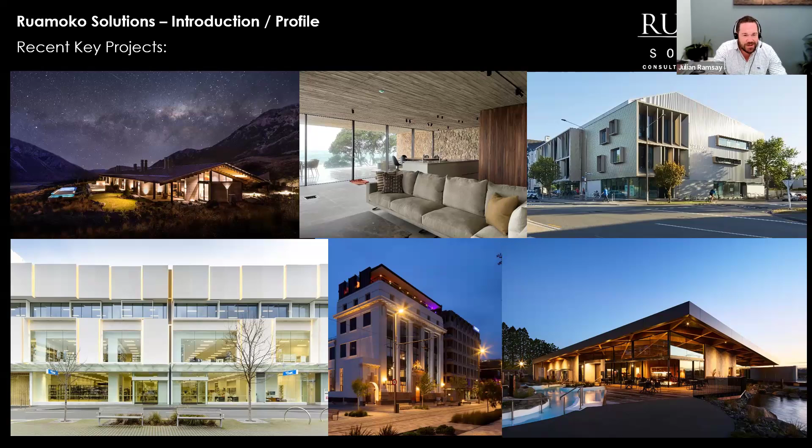There's a bit of high-end res. We do a lot of work for Patterson's Architects, based in Auckland. The school building on the bottom right, that's Redcliffs School in Christchurch. Building in the centre is a typical office building in Christchurch that was rebuilt. That was part of the rebuild.

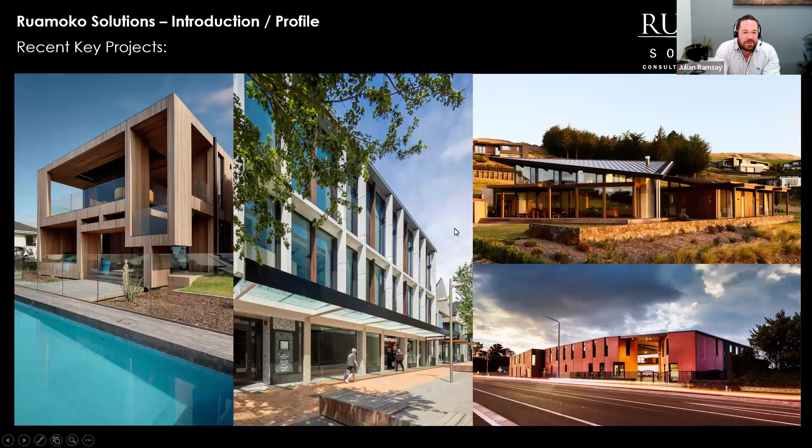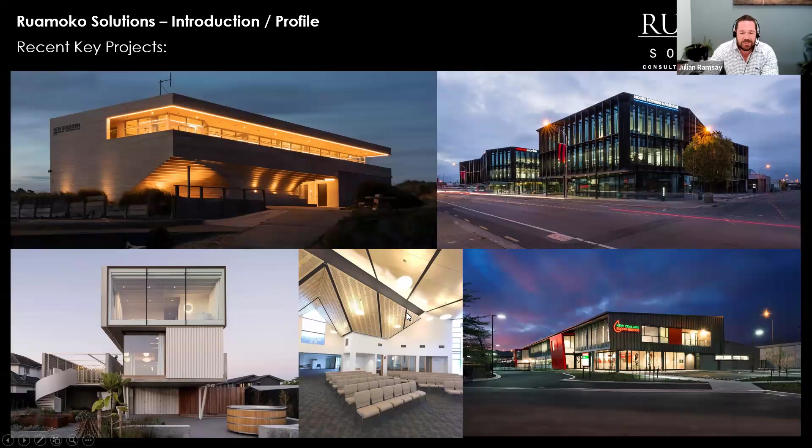A couple of quirky and weird houses. There's one on the left, and a church, St Mary's Church, built after the quakes, centre at the bottom. There's Flock Hill Lodge on the top left, suspended concrete chimney, that was fun. Lighting towers, that's Hagley Oval in the middle there, at the top.

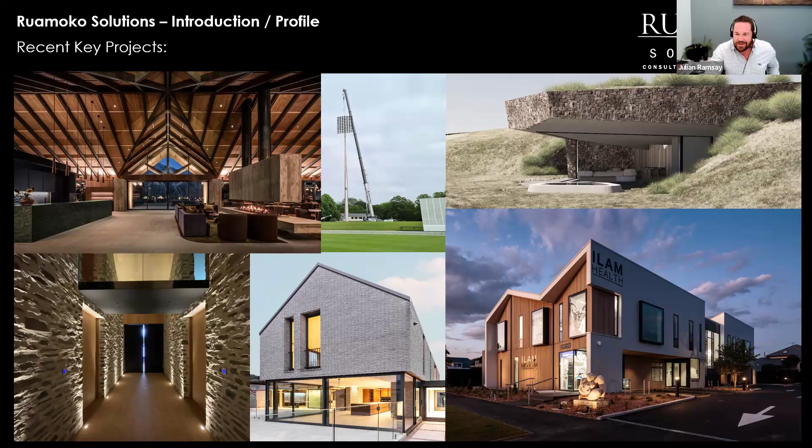Wakaroa, that's a Patterson's house with a 12-metre cantilever with terrain on top, which was a bit of fun, with a tolerance of about 5 millimetres on the end of the cantilever for glazing, which was a bit of fun. There's a couple of other houses there. I think that's Court Theatre, foundation pour, top left.

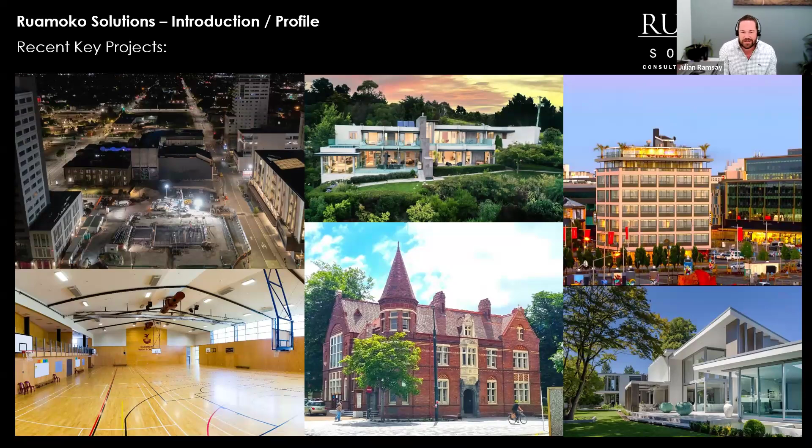There we've done quite a lot of strengthening work. That's the old municipal chambers in the centre. At the bottom, various other surf clubs, strengthening projects. The piano, which is in the entertainment precinct adjacent to the Court Theatre, that's on the bottom left. I'll talk about that a little bit more in a minute. A Feather from Afar, we do some sculptural work. That's in Shanghai, working with Neil Dawson, the sculptor.

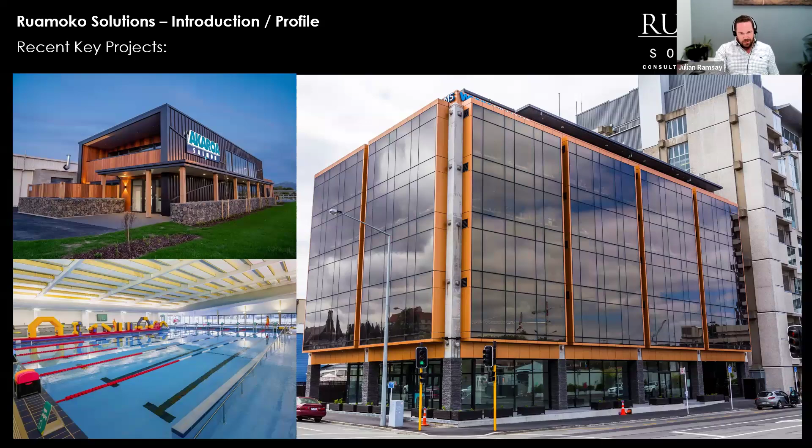Big car park in Christchurch, 9 stories, I think. Jubilee Clock Tower, that's in Christchurch. That's a strengthening project. Wynne Williams House on the right. It was a hybrid LVL beam and base isolated LVL post-tension beams and concrete columns. Bit unusual. I think it was the first base isolated building to be built following the earthquakes in Christchurch. A few other sculptures and strengthening projects. We base isolated the Christchurch Art Gallery, which was a pretty intense job.

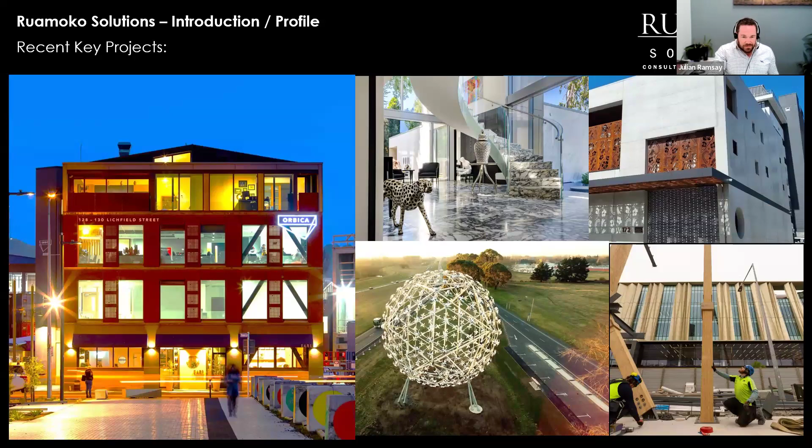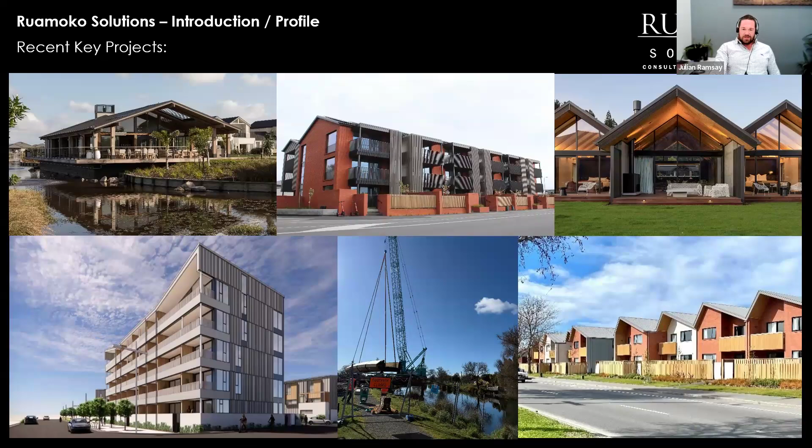In terms of the mass timber and sustainability focus that we've more recently been involved with, this is a building at 211 High Street, which is a mass timber building with CLT floors, LVL frame, and Tectonus devices. Unfortunately, a lot of this has been covered up with glazing and enclosed for fire reasons, but this is when it was being built, and obviously you can see fairly extensive use of timber on this job.

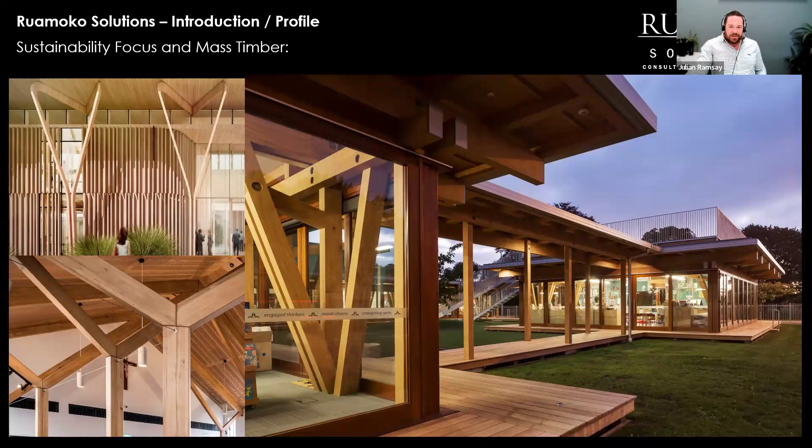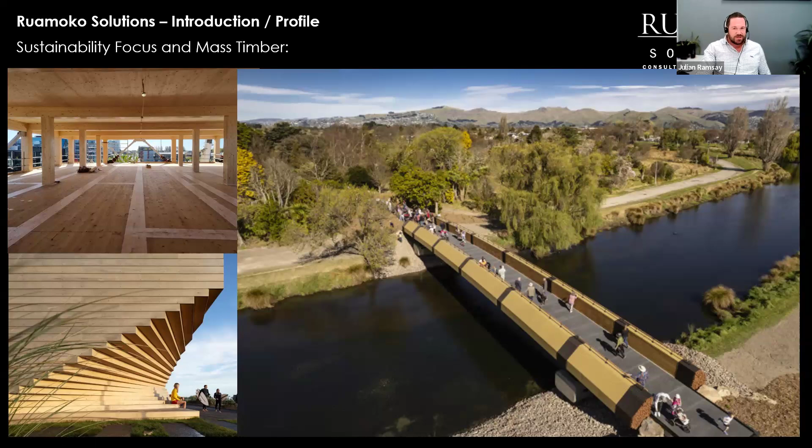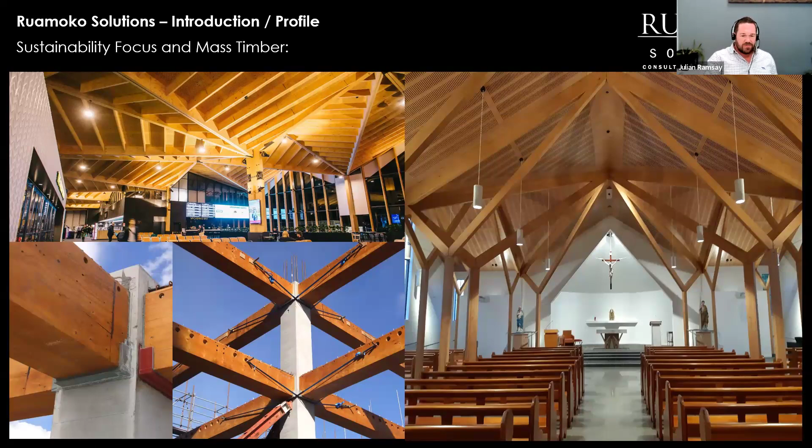There's Cathedral Grammar, which is another CNC machined timber structure, which was another award winner. St Patrick's Church, which was all LVL, possibly some Glulam there. The bridge I was talking about is on the right. It's basically two Glulam girders going over the river, just been hoisted into place in the last couple of months. There you can see in the centre of this image the Wynne Williams building with the post-tension LVL meeting the concrete columns.

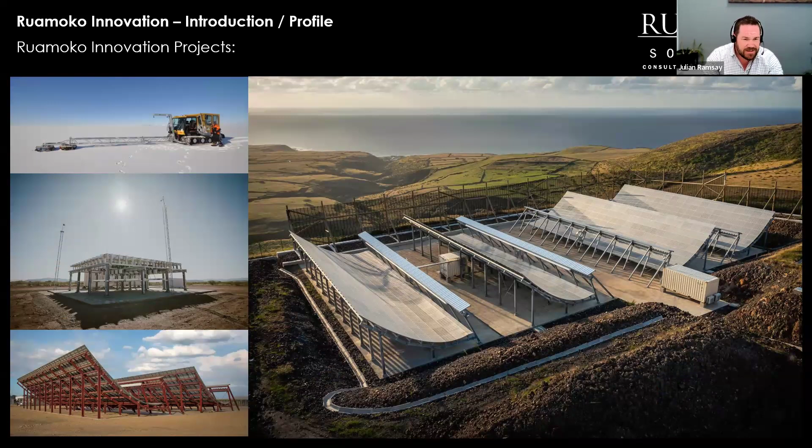We've worked in all sorts of random locations on islands all over the world. That's one on the Azores, which is off Portugal. That larger picture is something we did for a radar system for the purposes of monitoring global warming on the top left. That's in Antarctica. And then Costa Rica, Perth, Hawaii. So that's been a bit of fun. We've picked up a few awards, and they include for the Court Theatre buildings, as well as a bunch of other buildings. I'll try and wrap it up.

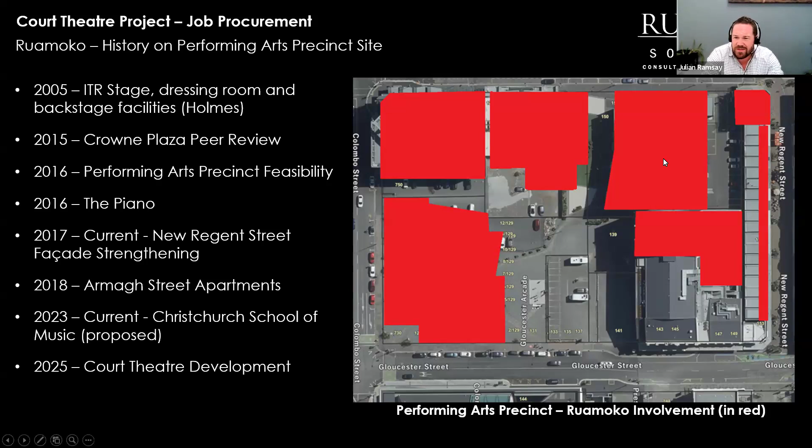History on the Performing Arts Precinct, where the Court Theatre is. We've done all the buildings basically in red. However, the Isaac Theatre Royal, that was done with one of our guys at Holmes Consulting Group in 2005. And we peer reviewed the Crowne Plaza that Lewis Bradford worked on, but we've worked pretty extensively on the other projects. The bottom left is the Court Theatre project, and the larger one at the top right is the piano building, which I mentioned earlier.

The Court Theatre are a theatre company, which I think is the largest professional theatre company in New Zealand. They were looking for an international quality theatre, something that's going to last for a long time. Hence, they did a bit of a journey around the globe to look at some of the best theatres of their kind, and they ended up getting the architects Haworth Tompkins, who are from the UK, involved as the architects, working with Athfields locally. Charcoal Blue, who are international theatre consultants, were involved as well, and drove a lot of the original design decisions.

Originally it was a $24 million project, but that crept out to a $62 million project, which wasn't really engineering related. There were a lot of factors such as project prolongation, scope creep, and weirdly enough, the desire for more, not less. So rather than being VE'd, it was almost the other way around. It didn't originally have a fly tower and fly grid, which Thomas is going to talk about. That got put in later.

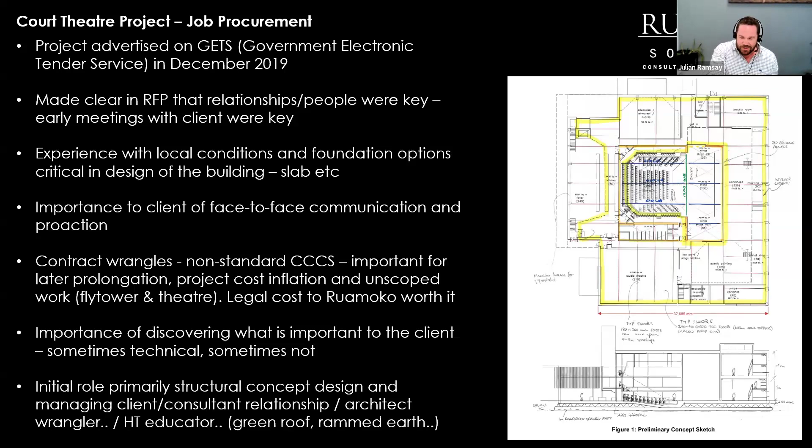Yeah, working with Haworth Tompkins as an English-based architect had its challenges. They originally were talking about green roofs and rammed earth, and it was a bit of a wrangle to explain the intricacies of some of the seismic issues that are present, obviously, in Christchurch in New Zealand. So that was obviously a bit of fun. And my role in particular was the concept design, the job procurement, having those early meetings, and basically wrangling the architect into coming up with something that was appropriate for New Zealand, basically.

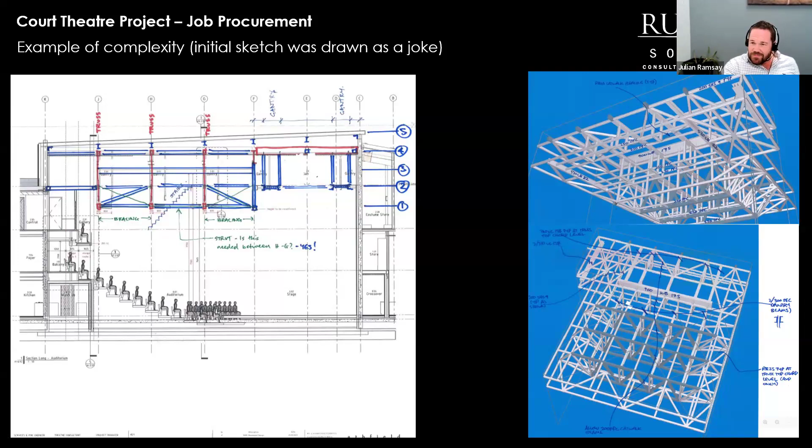This is an example of something that I actually sketched up in MicroStran as a bit of a joke, trying to explain that there were 5 levels of structure proposed for the roof. Can we get it down to like 1, maybe 2, possibly 3? So I drew up the sketch to take to a meeting as a joke, to present to the QS to say, no, let's revisit it. He takes one look at it and said, oh, no, looks good, carry on. So that just sets the scene a wee bit. That's pretty unusual in the normal course of things.

It has been a challenging project, mainly from a non-engineering perspective. There's been casualties in the client, the project teams, and a lot of people have found it fairly challenging, contractor as well. COVID, prolongation, funding issues, budget and scope increases, but it highlights the importance of pitching in. The jobs tested people. When projects are running well, anyone can look good, but during a bit of adversity is when it really matters.

And the measure of a good project is not just the awards won and being on time and budget, but can you still enjoy the journey and have a laugh afterwards, or a beer? And that's certainly been the case on this project, where we forged particularly strong relationships with the client, which was great. So yeah, it comes back to the Ruamoko ethos of people, passion, and results, and it's led certainly to further work. So I'll hand you over now to Thomas, and he will take you through some of the more technical aspects.

Oh, thanks, Julian. So my half of the presentation will go into a bit more of the technical ins and outs of the job.

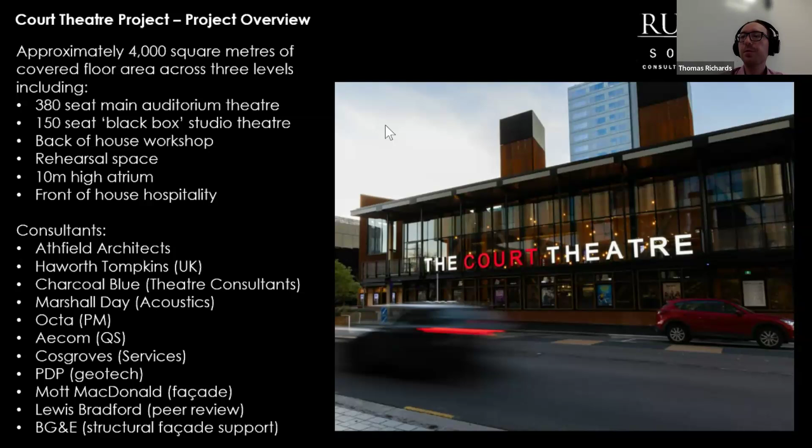So moving on to some structural design parameters. The brief was for a 300 plus auditorium. So we went straight to IL3. The relatively large building plan to height, tight SLS deflection requirements, and plenty of walls to make up the performance spaces kind of led us down the path of adopting a nominally ductile approach.

The building didn't warrant any fancy time history or modal response analysis, so we adopted a standard 1170 equivalent static to give us some sort of a gauge on the forces that we had to design for. At roof level, we're up to 1.3 G, right down to 0.3 G at level 1 or mezzanine.

On the geotechnical front, the Arts Precinct generally has a consistent geology profile and a sound gravel bearing layer pretty close to the top. Geotechnical investigations undertaken identified medium dense gravels at about 1.5 to 2 metres depth across the site. And typical with a lot of sites in Christchurch within the CBD, the site was overlaid by uncontrolled fill from previous demolition. And no surprises, that fill tested positive for asbestos, and that all had to be trucked away and disposed of properly.

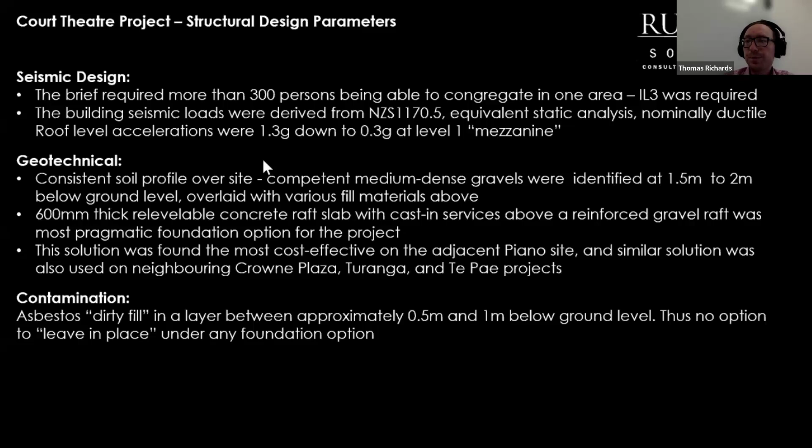So the project brief required various building use cases to be accommodated and packaged into one building. These range from large open performance and rehearsal spaces, offices for the Court Theatre, full workshop, stage set construction, through to the hospitality side of things, including bar, cafe, and function space.

Integrating diverse functionality posed quite a challenge structurally. A lot of the upfront effort involved working closely with the architect, ensuring that we could develop and place structure to form robust load paths. And key to the building, which is quite piecemeal in nature, having everything well tied together was high on the list of things to achieve.

Ultimately, we settled upon having the main core of the building, which is the auditorium, formed up by precast walls around the outside, all tied together with a concrete floor that wrapped the full 360 degrees around the building. The internal precast walls that made up the auditorium space, they were 250 thick. That was driven by a combination of having enough density and material for acoustic requirements and needing sufficient out of plane capacity for some of the taller panels in the auditorium space. I think some of those panels are getting close to 40 tonne, if I can remember.

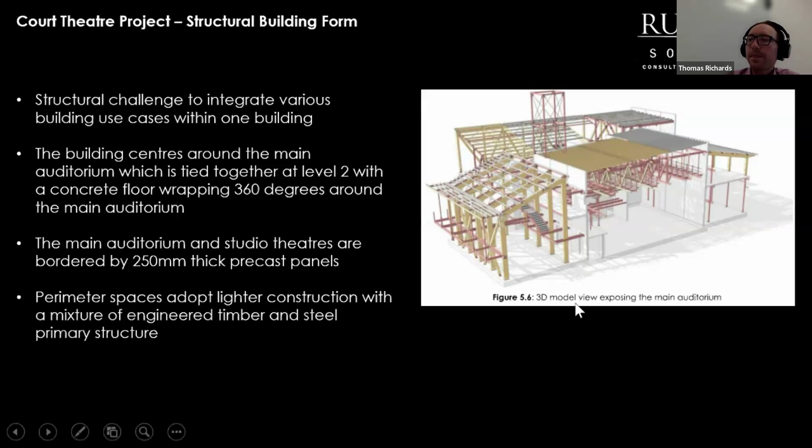Having a robust core meant that we could free up some of the space around the outside of the building, and we could adopt some lighter structural elements such as the use of LVL, Glulam, and steel. There was a concerted effort by the design team to integrate as much timber elements as we could. The architect was very much trying to express the timber and not hide it away, and that included the steel connections.

This choice of structural material was really a balance between accommodating the functional demands of the space. For example, in the auditorium, we had quite big spans carrying quite substantial theatrical loads, so steel was best suited there. But around the outside, where we could rely upon LVL to support the lightweight roof, that was adopted.

With the heavy lifting or seismic lifting being done by the core, we were able to adopt a lot of large LVL timber members around the outside. I think the image on the right there gives a good showing of what we went with. So the blue being steel, grey being concrete, and the yellow being timber. You can see the blue tends to sit in the middle of the building, the grey, and then as you work your way around the outside of the building, you get a lot more timber elements.

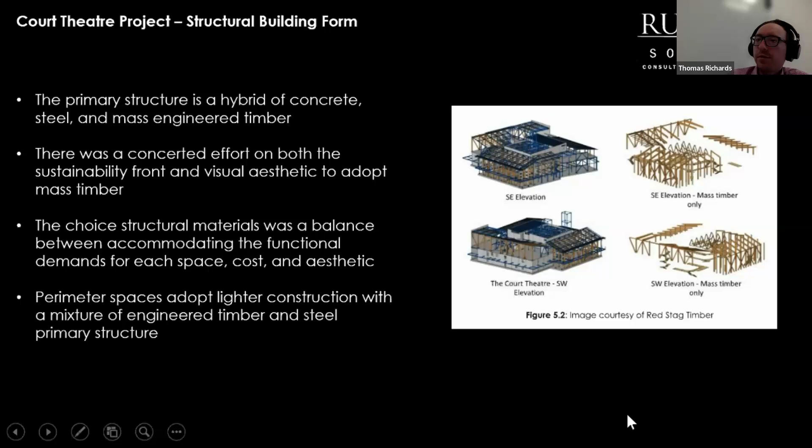So at the ground floor, as mentioned earlier, we went ahead with a concrete raft slab over reinforced gravel raft. The slab sits at a constant level except for the main auditorium. It steps down approximately 500 mil. The same 600 mil thick slab is still maintained through this area, just stepped down. The finished floor level is actually 300 mils higher than the structural slab. We ended up going with a non-structural slab over top of polystyrene.

And I say non-structural, but the slab was still designed to accommodate some of the lifting vehicles that the Court required in the workshop space. The architect had various step floor levels. Initially, we were looking down the path of having multiple steps throughout the structural slab. However, to try to simplify construction, we adopted a one-step slab, and then we decided to go with forming the architectural steps with the non-structural polystyrene and concrete topping on top.

This not only had significant advantages of making things simpler on site, but it also meant that a lot of the services could be accommodated within this non-structural slab. And it kind of avoided me having to arrive on site finding my reo cut to accommodate a toilet pipe.

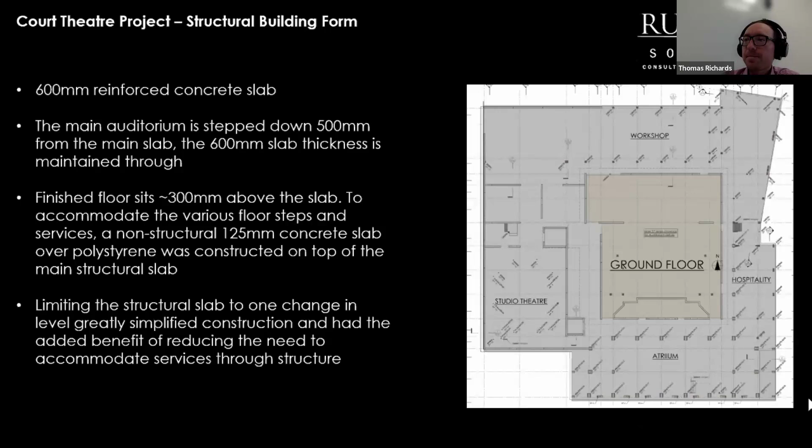So level one, I guess you could consider this more of a mezzanine. The mezzanine or level one wraps around the main core auditorium, the studio theatre to the west, or to the left-hand side of that picture, and wraps around the main atrium to the south. The primary function of this space was for hospitality and egress into the main auditorium and studio theatre. We had the luxury of being able to place steel beams where we wanted to through here, so that allowed us to adopt a lightweight floor. That also had the benefit of reducing some of the seismic mass to the building as well.

The floor was constructed from a mixture of LVL, standard SG8 floor joists, and CLT in the studio and main auditorium space. One big challenge here was the space available to fit structure. So the UK architect set us a floor height of 3 metres, which wasn't really enough, and they got locked in pretty early. So we were forced to accommodate both structure and services for the most part in the same plane. This did lead us to quite a lot of on-site consultation on the best approach to navigate both services and structure.

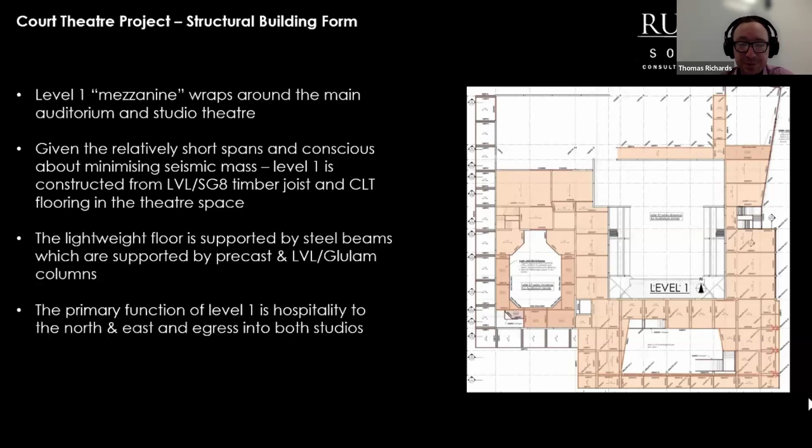So moving on to level 2. Level 2 is constructed from a combination of rib and infill, double T's, and in-situ concrete. Level 2 is a mixed-use space, so it accommodates rehearsal, function space, wardrobe, the Court Theatre's office, and forms a bit of egress around the perimeter of the central atrium. The live loads for the rehearsal space were all driven by Charcoal Blue, the theatre consultant. I think they were in the ballpark of about 5 kPa for a lot of them.

Over the rehearsal space to the southwest, they required 4 kilonewton point loads to be hung from the floor for the studio theatre below. That, in combination with quite a large 11.5 metre span, meant that this was one area where we had to adopt double T's as opposed to the rib and infill. Most of the spans sit in that kind of 3 to 8 metre range, which was perfect for the rib and infill. Just over that rehearsal space, we had to go with something a bit more grunty.

Along the east and south side, the floor actually narrows. We needed a pretty robust diaphragm through there and girts to restrain some of those heavy panels. So ultimately we went with the 250 thick in-situ concrete just to give it enough guts to provide that seismic restraint.

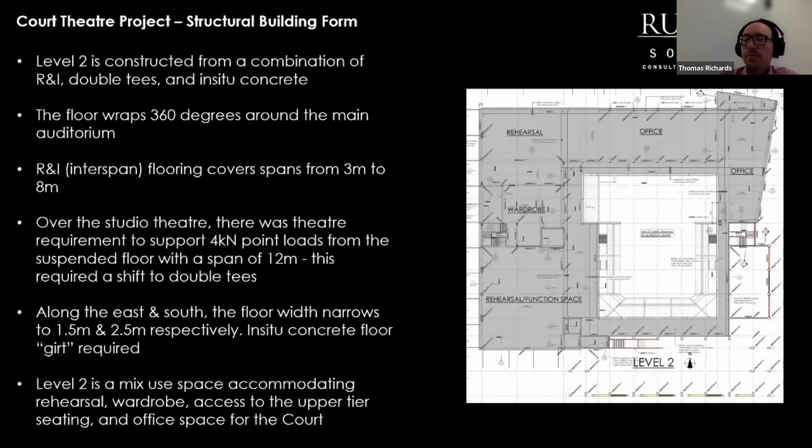So at level 3, internally we refer to this as the trench level. This is effectively a plant deck level, much the same as level 1. This was constructed from LVL joists overlaid by ply. Again, similar intent to try to keep seismic mass down, especially at this level, being higher up.

The joists rake to make up the architect's roof falls. It did pose a bit of a challenge for the architect, given the length of it and needing internal downpipes. I don't think it was an easy thing to resolve on their front.

Probably the biggest key driver for this level was, one, to have enough space to host the quite substantial ventilation systems and to conceal it from street view. Given the high aesthetic demand for such a building like the Court Theatre, the architects were very keen to not have big open ducts showing from below. The trench solved that perfectly by being able to hide those ducts in between the roofs for the main auditorium and some of the outer spaces that sit around the perimeter of the building.

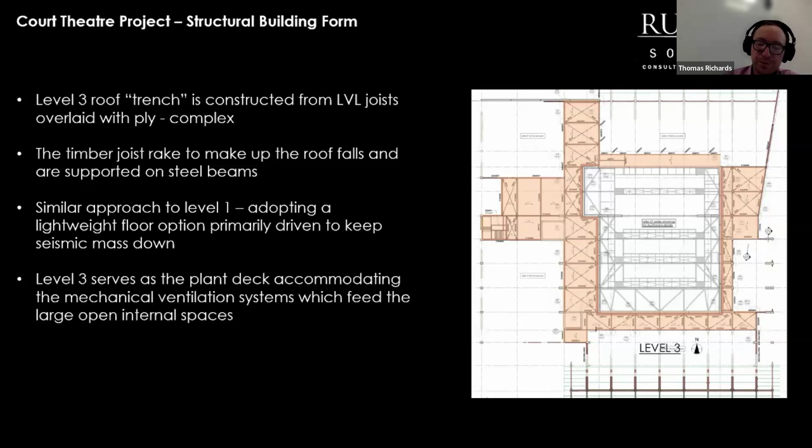So at roof level, the roof just adopts conventional DHS purlins, spanning over both LVL beams and timber steel pitched beams or pitched trusses over the main auditorium. Initially, the DHS was a late VE substitution for LVL. For the most part of the design, the roof was made up of LVL purlins, but again, it was quite a significant cost saving had by swapping out LVL for conventional DHS purlins.

The only timber purlins that remained were to the southwest corner, where the ceiling was exposed and the architect was keen to keep the timber visual element maintained in that space. Over top of the roof, we had a warm roof, and that was overlaid by a conventional metal profile, except for the south atrium. That was more of a bespoke roof, so that had DHS overlaid by stud framing, overlaid by warm roof, and then on top of that was Corten.

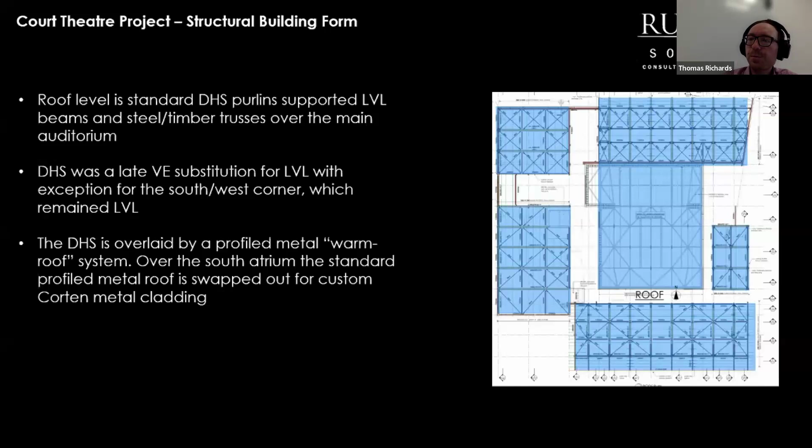So moving to the front of house or south side of the building, the main atrium serves as the primary entrance and hospitality space. This space is largely formed up by 600 by 270 LVL beams supported on LVL columns. Given the lightweight nature of the roof, we were able to brace this along the southern wall with CBF LVL bracing. This effectively just braces the roof to the atrium and part of the level 1 mezzanine.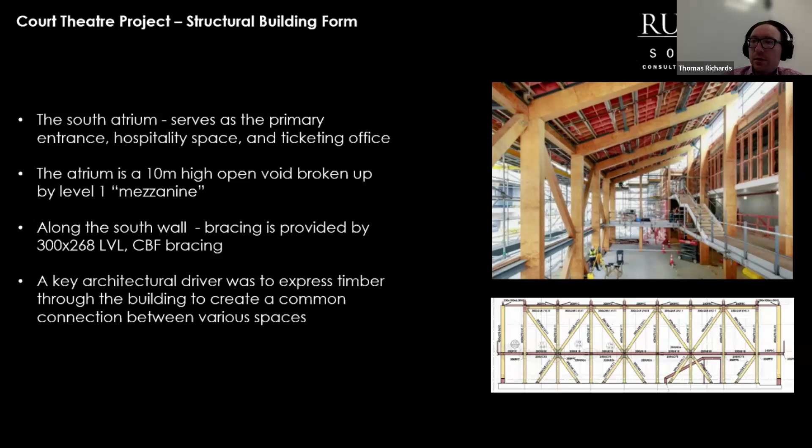A similar approach was continued through to the west side of the building. Again, we were able to support the lightweight roof with large LVL beams. These primary LVL beams were supported by LVL columns, and again, we just utilised the CBF LVL bracing along that west wall line. Fortunately, the architect was also still keen to have all the bolted steel connections for the LVL expressed, so we weren't having to fiddle around with concealed or plugging up steel connections, which was helpful on our side.

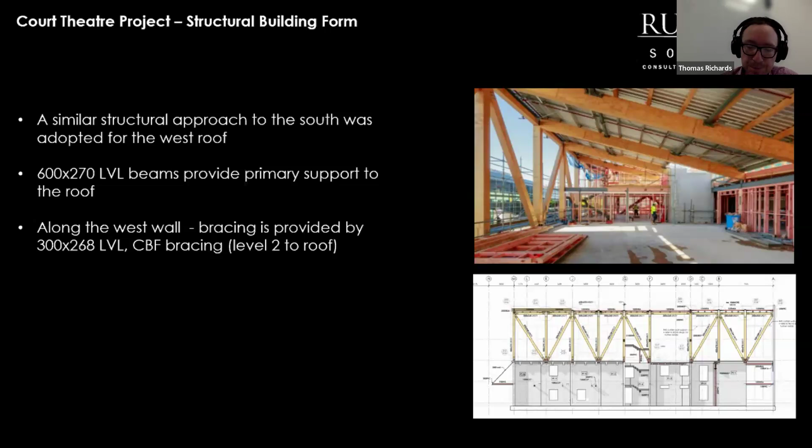The tricky part of the job, the main auditorium. The main auditorium is approximately 380 metres squared. The stage is positioned to the north end of the auditorium, and that consists of a demountable rostra for maximum flexibility for Court Theatre, and spills out onto the seated area to bring the audience as close as possible to the production, to the show.

The design brief to the architect was to create a close, intimate theatre, which put a big premium on space to fit structure and services. The extensive theatrical and operational requirements had to be integrated into the primary structure that encompassed 25 line sets, 6 independently moving travelling beams which sat over the audience, and 4 suspended catwalks.

Adding to the challenge was working with the theatre consultants, which was split between UK and Australia, just to add to the complexity of the job. To ensure the roof was designed fit for purpose, we realised pretty early on that it was key to have good and constant dialogue with the theatre consultants as they were driving the load demands in the space. We spent a lot of time making sure that we were interpreting their design requirements correctly, and that was followed through to construction.

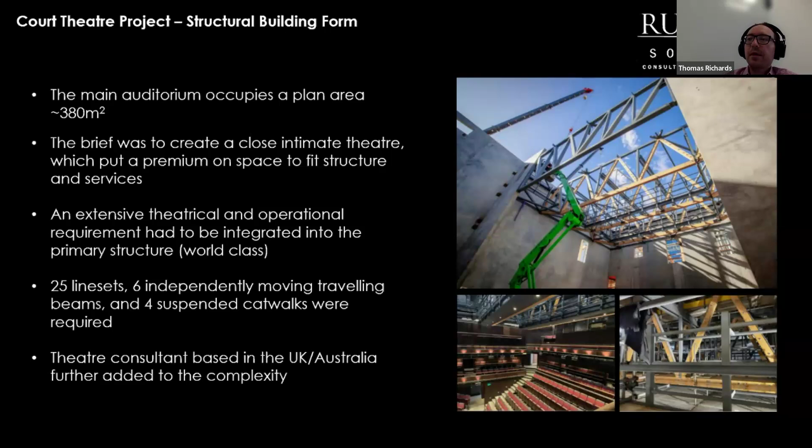So the auditorium roof is supported by 3 flitch timber beam trusses and 1 steel truss, which kind of sits over the proscenium. The span here is approximately 18 metres. There was a strong desire from the architect to fill the roof space with deep timber trusses. This was to help aid in that intention to create a feel of intimacy in the theatre space and to provide that continuity of timber throughout the building.

However, when we explored that option further, it quickly became apparent that going with an all timber truss wasn't going to be feasible, largely due to trying to connect a lot of large timber members and integrate it with both the steel structure and catwalks and the extensive theatrical equipment demands. So as a bit of a compromise, we worked through with the architect to adopt the flitch timber steel truss. A flitch truss was probably the most pragmatic solution here. It allowed for that continuity of timber through the auditorium space, which kept the architect happy. It also had a structural benefit of increasing the compression capacity of some of our chords.

In this auditorium space, there are two levels or two tiered levels that wrap around three sides, along with seating in the middle. And if anyone's actually been to a show and found navigating seats to be tight in space and quite difficult, that was not a design flaw, that was intentional. So the idea is you don't want to be too comfortable in your seat so that your full attention is paid to the show.

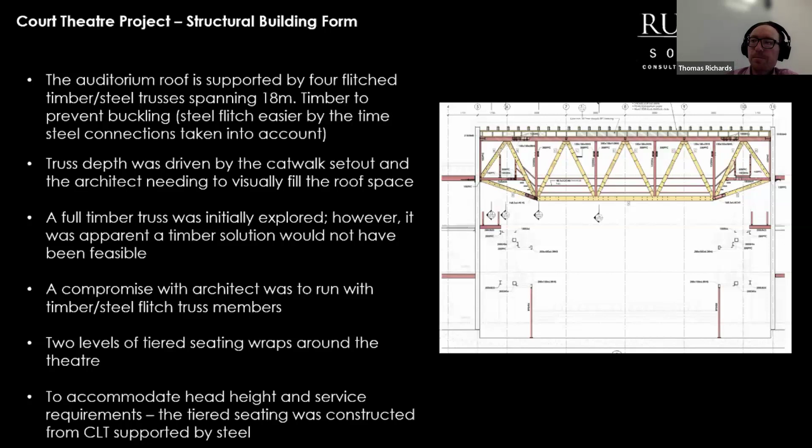As Julian mentioned earlier, there were multiple levels of bracing that needed to be accounted for. So the picture on the left, that's catwalk level. Picture in the middle, that is the plant deck level. And the picture on the right there is the roof level. Effectively, we had 5 levels and 3 levels of bracing plane, and that all needed a pretty robust and direct load path back to the primary bracing structure, which were the precast walls. Not only that, we also had to integrate the extensive and large amount of mechanical ducting through the space, catwalks, and the travelling beams, all just adding to the challenge.

Yes, on the left, the catwalk level, that was braced back up to the level above. We utilised CHS members through the space to tie it all together. I couldn't find a good picture to demonstrate, but the space is extremely congested. Once you mixed in everything along with seismic restraint and the acoustic ceiling that sat just below the top chord of the truss, things became pretty tough to fit. This is really where the digital modelling space really helps. An extensive amount of modelling was done just prior to construction to ensure that we could fit everything together.

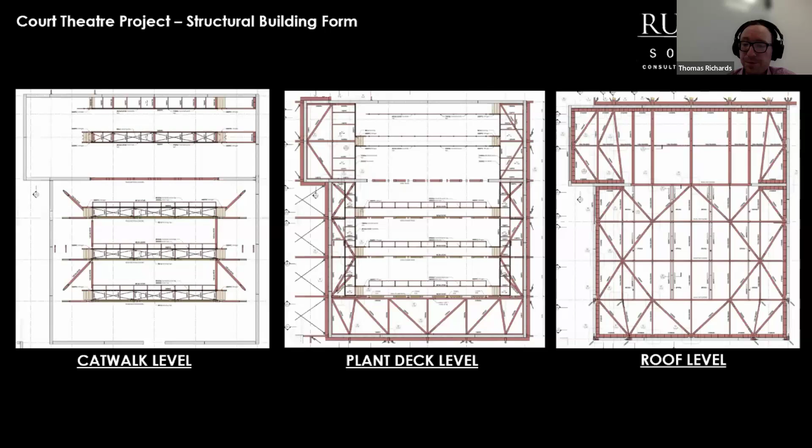To give a bit of context of some of the complexity we faced with structure within the auditorium roof, these are kind of our standard truss node connections. So the top row, these are the bottom chord of the truss. The bottom row, they are the top chord of the truss. In many instances, we had kind of 6 to 8 members all noding into one. Fortunately, we had a drafter that really enjoyed steel modelling. So when it came to fabrication, the steel fabricator had quite an extensively worked through model that really did help when it came to construction. The roof came together pretty seamlessly, and there were no real major hiccups for installation.

One thing we had to be careful of with these connections during fabrication is that the sequencing of how the steel members were welded together was pretty critical. We had to be careful reviewing the shop drawings that the right members were welded first to ensure that there was the correct load path through the joints that we were intending.

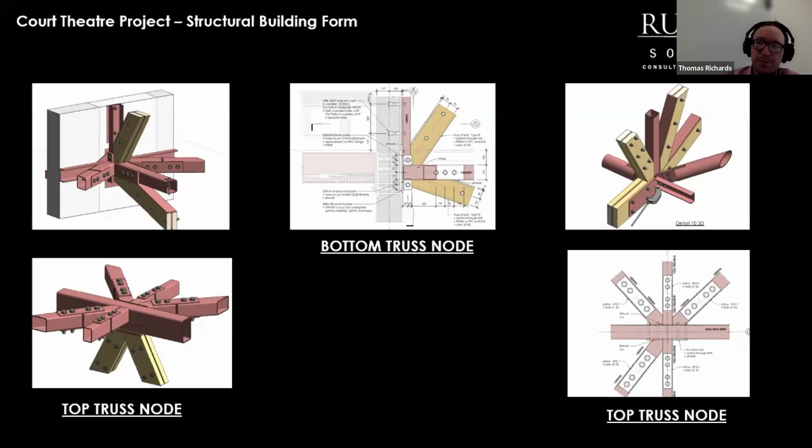To speed up construction, the gravel raft was constructed prior to consenting the superstructure. And that was probably done about a year, or almost a year, before foundations started going into the ground. Construction started at the end of 2022, but really things kicked off at the start of '23.

To Hawkins' credit on the job, they recognised pretty early on the complexity of such a build, and they took it upon themselves to lead a BIM-first approach. This included extensive modelling of architecture, structural services, seismic restraint, and we had regular coordination workshops and used Revizto for clash detection. And it really ultimately paid off. I would struggle to see how this building would be built without first solving issues in the digital space.

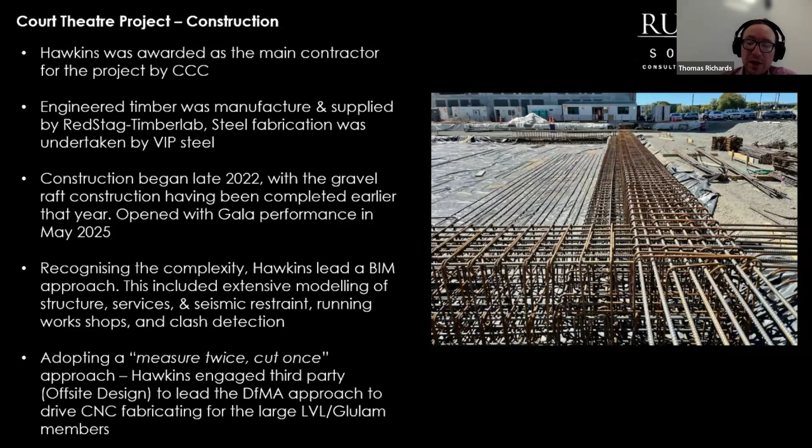The engineered timber interfaced across both steel and concrete. We had a lot of early discussions in terms of install sequence, and we made minor adjustments to connection details to suit prior to fabrication. This really helped on site, and things came together very smoothly, a testament to the hard upfront work and the whole digital coordination process.

There wasn't a single mishap with the installation of the LVL members or engineered timber members. And in the words of the contractor, there was only one piece of LVL that required a wee gentle persuasion to get in place.

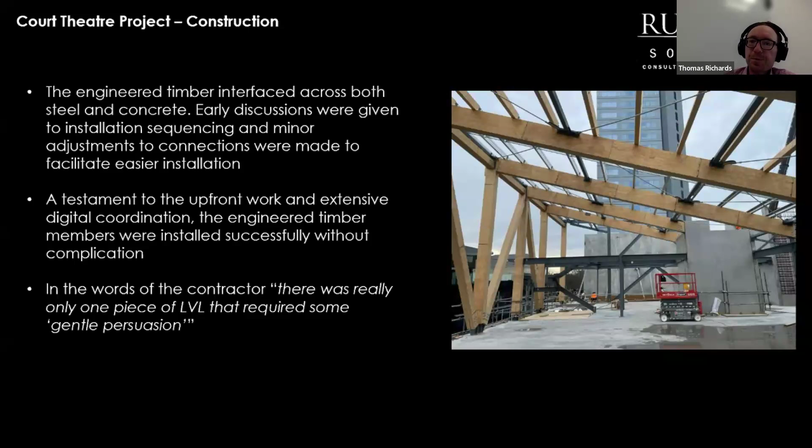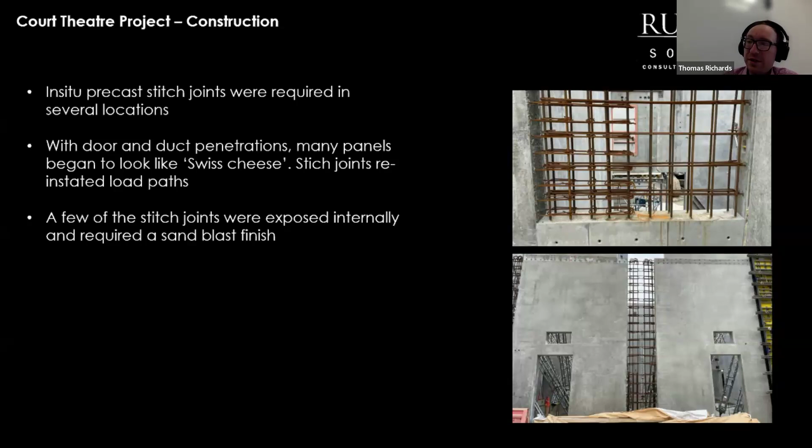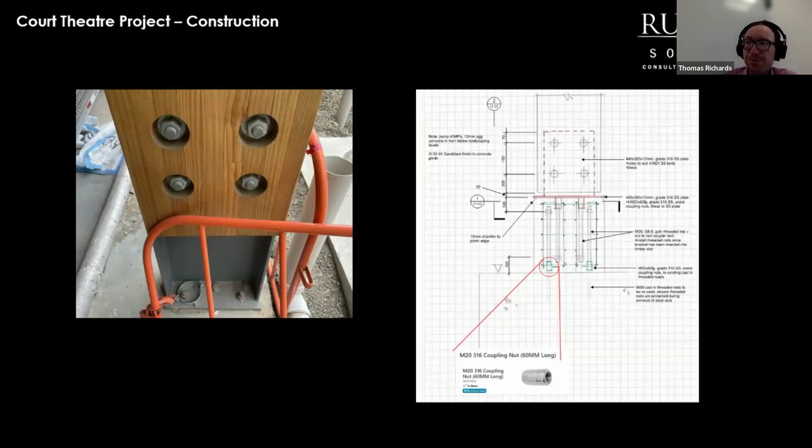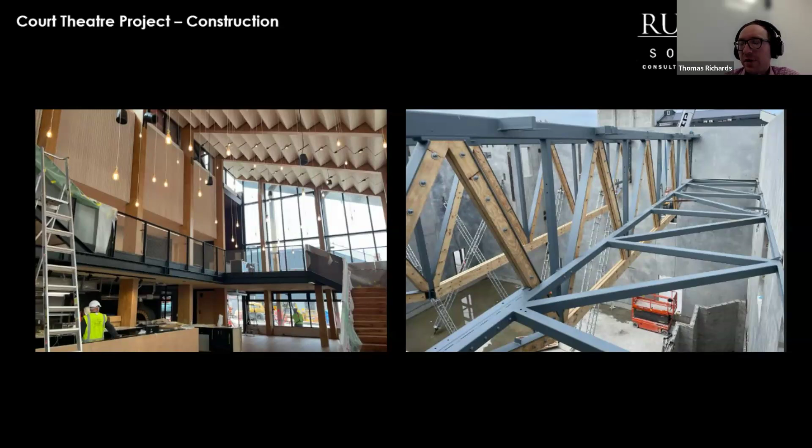For a project of this complexity, the core structure of the building came together, all things considered, pretty seamlessly without any true major complications. A large part of that was due to the proactive contractor, experienced foreman on site, and consultants' willingness to engage and be part of the construction process. All that played an enabling role to ensure a successful build.

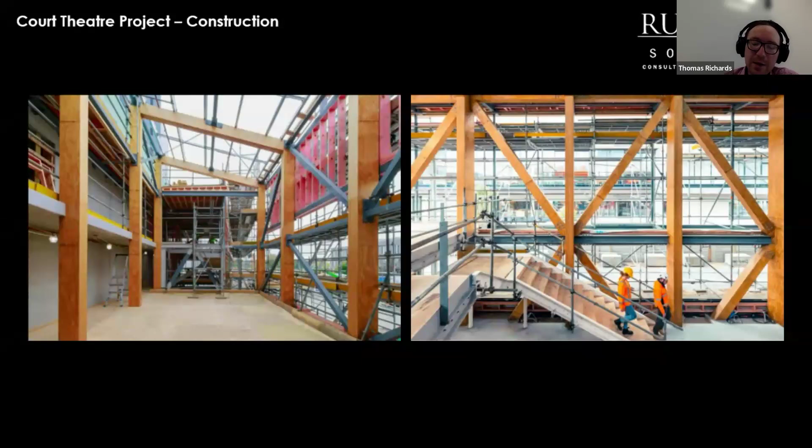Oh, thank you so much, Julian and Thomas, for this wonderful presentation on the Court Theatre. I really enjoy when I walk around and see the structure. I really pay a little bit of attention. It's a beautiful building to have around Christchurch. So congratulations on that.